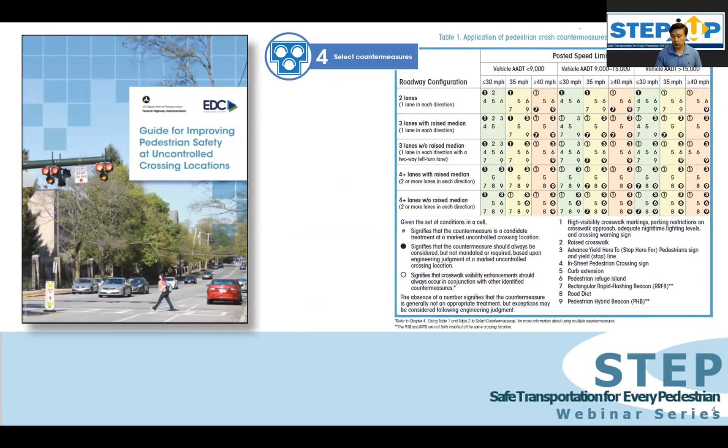So, once again, just a quick reminder with regards to these spectacular 7, and 6 of them are on this table, table 1, which you can find in the Guide for Improving Pedestrian Safety at Uncontrolled Crossing Locations. We really encourage everyone to download that and take a look at this.

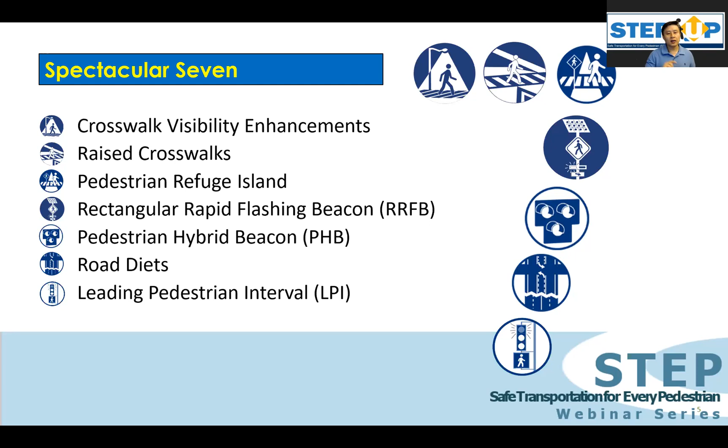And then the spectacular 7, just a quick reminder with regards to what these are: the crosswalk visibility enhancements, which actually has several subcategories with marking, signs, lighting, intersection geometry, such as curb radii and curb extensions. And then you have raised crosswalks, pedestrian refuge islands, the RRFB, the PHB, road diets, and leading pedestrian interval. Remember, the leading pedestrian interval is the only spectacular treatment that is not in that guide. It's specifically for signals.

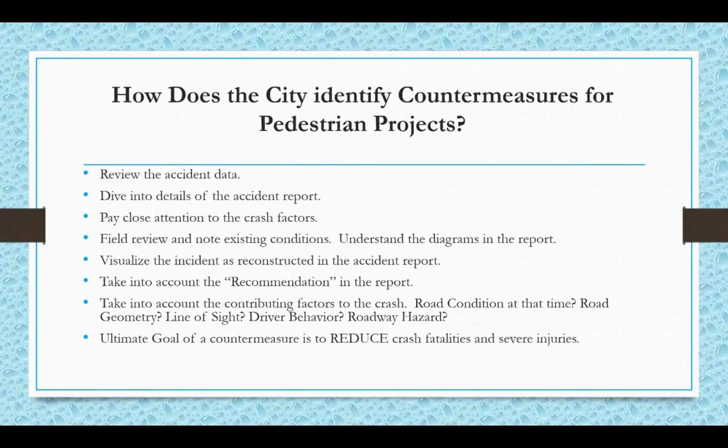So for the next few cycles here, from Cycle 5 to Cycle 10, I'm going to go over the countermeasures that were identified for each of the projects. So in Cycle 5 here, I have 3 countermeasures, 3 separate projects. The countermeasure here for the first one is rectangular rapid flashing beacon in school zones. So the locations here are identified on roadways that were near a school zone.

There has been communication and actions taken prior to help improve safety in there. However, a rectangular rapid flashing beacon was the best suited treatment for those school zone areas. This was communicated with the schools and the communities, and we got the project going and they were implemented. And we're still checking on the monitoring in there. Indications show that the accident history has gone down as far as reported incidents with pedestrians.

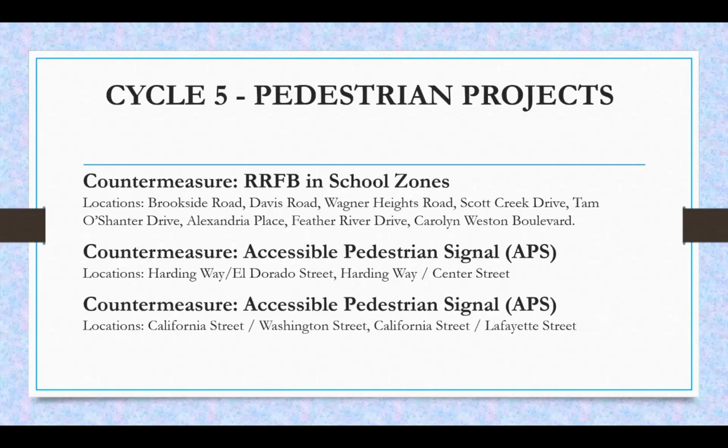So for Cycle 6 pedestrian projects, we received funding to implement rectangular rapid flashing beacon on various roadways such as AG Spanos, Center and other places here in Stockton. The next one here is pedestrian crosswalk safety improvements on West Lane, which included high visibility crosswalk, ADA ramps, and other markings and signing. Another one here is pedestrian crosswalk safety improvement with a signal on B Street and Arch, which included APS, crosswalk across Airport there, which is still a busy roadway.

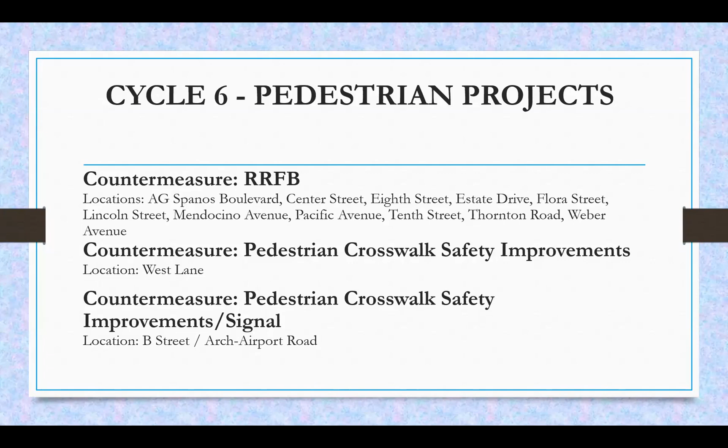So for Cycle 7 pedestrian project, we received funding to install a HAWK on Airport Way and Sonora. This is basically to help facilitate pedestrian crossing from one side of the street to the other. Both sides of Airport have bus stops, and this project is in conjunction with a partnership with RTD.

So for Cycle 8 pedestrian projects, the first countermeasure here is the HAWK. This is at Carolyn Weston Boulevard and Ishi Goto Street. Initially, this was looked at as a possible rectangular rapid flashing beacon, but due to the nature of the incidents that occurred there, and also Carolyn Weston being higher volume and higher speed, a HAWK was more suitable. So that was decided and implemented.

Another one here is the countermeasures in the school districts. So between the schools in the area and the communities, these were discussed as being more effective as rectangular rapid flashing beacon. Another project here is a road diet on El Dorado from Hammer Lane to Morada. This is switching your typical 4-lane into 3-lane.

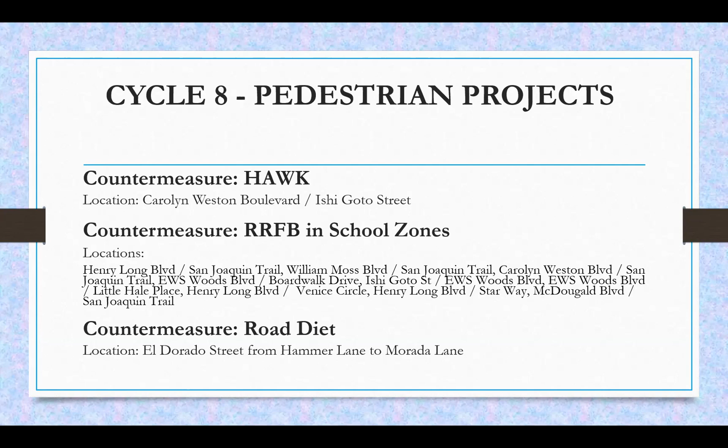So this will have a two-way left turn lane, a single lane on each side. Bike facilities will be installed in there, as well as other treatments to slow traffic down.

So for Cycle 9 pedestrian projects, the first countermeasure here is rectangular rapid flashing beacon. On the location shown here, these roadways are high volume, which require the attention of the driver to the crosswalk. So in instances where pedestrian involved accidents were reported, an RRFB was the best solution to gain that attention from the driver.

The next countermeasure is the pedestrian crosswalk safety improvements, which involve doing high visibility crosswalks, realigning the pedestrian path to be in line with proper location in there. This location is very challenging because of the geometry and the grade separation that's involved in the path of travel.

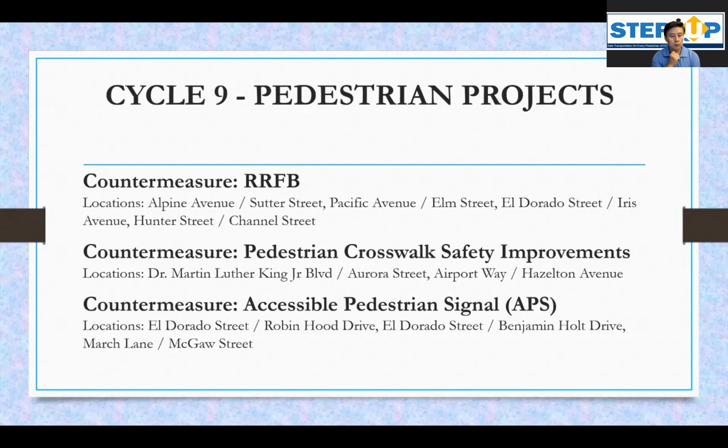The next countermeasure here is accessible pedestrian signal at El Dorado, Robin Hood, El Dorado, Ben Holt, and March Lane and McGaw. These will include APSs as well as the leading pedestrian interval. That'll help improve crossing for pedestrians.

So for Cycle 10, we have a countermeasure of HAWK. This project involves installation of HAWK at 8 locations, generally in the downtown area. That project is awarded about $5.5 million for the installation, including design of the HAWK locations.

Another countermeasure here is pedestrian crosswalk safety improvement at the locations of Madison Street, intersecting with Willow, Vine, Rose, Magnolia, Acacia, Poplar, and Flora. And lastly here is an APS on Pacific and Harding and Lincoln as part of a signal upgrade, including APS to help pedestrians cross.

Now we'll get into the challenges that presented themselves during the design for Dr. Martin Luther King Jr. Boulevard. So the countermeasure here is pedestrian crossing improvements. The challenges are tight or limited existing space for pedestrian paths. Vehicle lanes are also tight on railroad grade separation. Existing conditions are antiquated, limited funds. Although limited, we are able to design and deliver the project. In the application process, there's some strategy in the application to keep a competitive benefit over cost ratio.

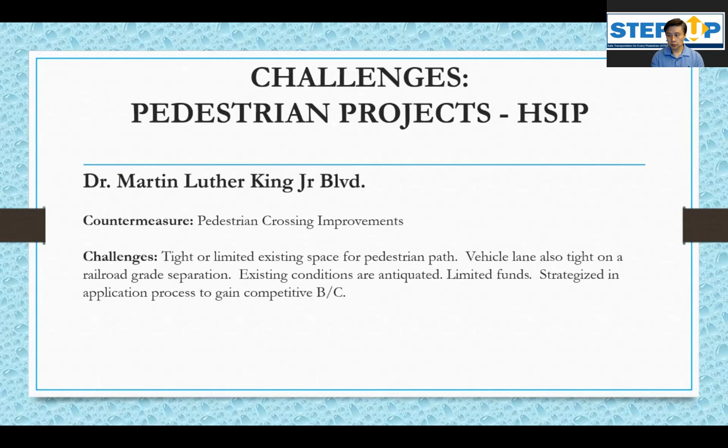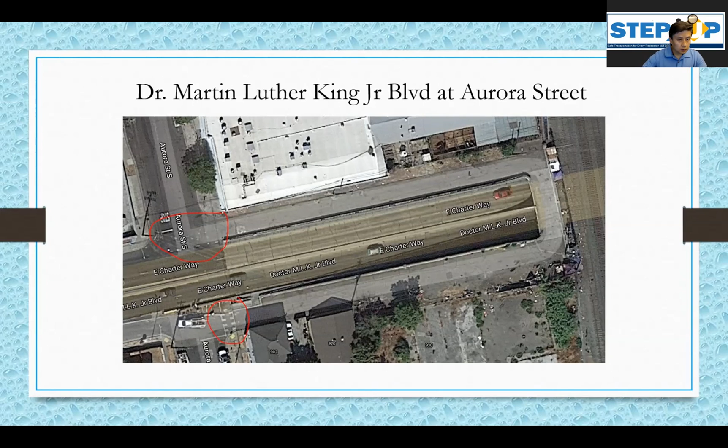This is the aerial view of the location at Dr. MLK at Aurora. And as you can see over there with the highlighted areas of the crosswalks where pedestrians are crossing the street or changing from the roadway to the pedestrian paths. To the right side of the U in there is the grade separation.

The next project that we have challenges on is the Airport Way Sonora HAWK. This one is located south of the Crosstown Freeway with bus stops on both sides of Airport Way with no current marking on the crosswalk. Upgrading of ADA ramps with the underground utilities was a challenge in the design process, trying to locate the best place for the ramp and also trying to stay away from the underground utilities.

Another issue that came up that we are looking into is timing, possibly timing the signal on Hazleton to the south to make sure that progression is at a safe pace when folks are crossing here. We want to make sure that they're timed correctly to make certain that it's safe, not creating additional issues.

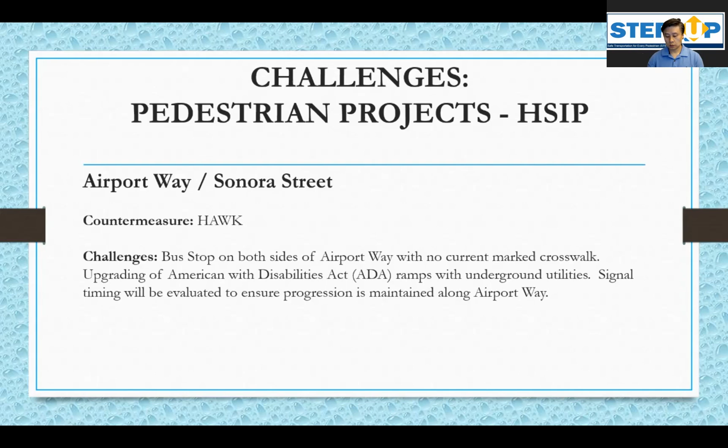Another project that we had challenges on is the rectangular rapid flashing beacon at locations on Alpine Sutter, Pacific Elm, and Hunter Channel. So one of the examples I'll point out here is Hunter Street and Channel. This one, due to the limited funds on it, we decided to keep it in-house so we can design appropriately and also deliver the project within that budget.

The location of pole standards are in conflict with existing utilities and existing street lights or signs. The challenge there is making certain that when we start placing our hardware pole standards, we do not create another project to relocate utilities or be in conflict.

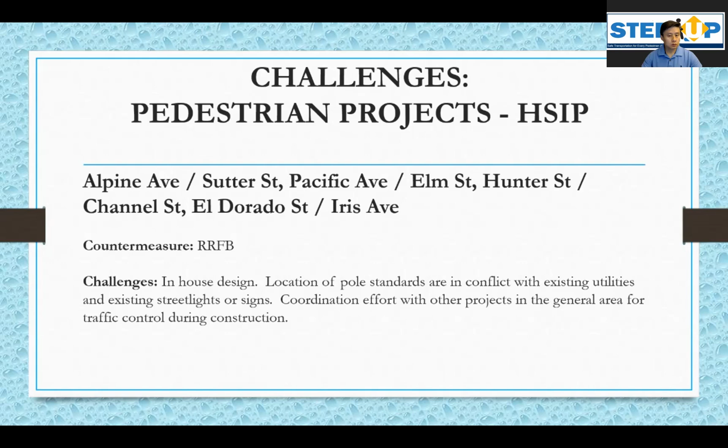Another location that we faced challenges on was the Carolyn Weston Boulevard at Ishigoto when a HAWK was installed. This is a second installation of a HAWK in the city, and drivers are still getting familiar with the HAWK. Speeding is predominant along Carolyn Weston, and so folks are still hesitant crossing in there, even though the lights have a signal to allow pedestrians to cross and to stop drivers. With the early stages of after installation, we noticed those things were happening.

So a City Council member created an educational video to help guide pedestrians and drivers when they're facing the HAWK signal. That helped, and it seems to be helping as we move forward with the installation of additional HAWKs in the city.

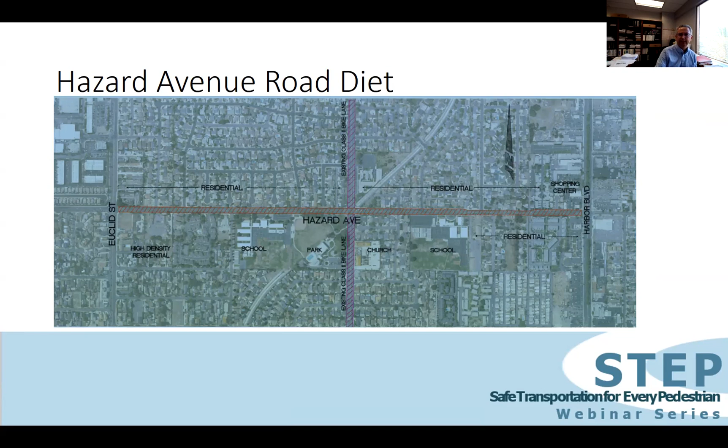One of the things that we ended up doing is we actually applied for grant money separately. One of the concerns that we had early on was what happens if one of the adjacent jurisdictions may have issues, maybe the political will is not there to do a road diet in their jurisdiction. And if we do a joint grant, that's going to hamper our ability to move forward with what we want to do. So that was really insightful for us to do that early on, because eventually as the project progressed, the other jurisdictions who applied for a joint grant for this project actually didn't have the political will. So their project did not proceed. But fortunately, I'm glad to say that our project is actually in the ground.

So the project actually showed the road diet here. We ended up going from the 2 lanes to the 1 lane in each direction. One of the things that we did here is we allowed space for parking. We don't necessarily have the parking out there right now, but we do want to work with the community to make sure that if they want us to add parking, we could do that. So we allowed it so that it's flexible for future consideration if needed. Some areas do have the parking, but not all the corridor.

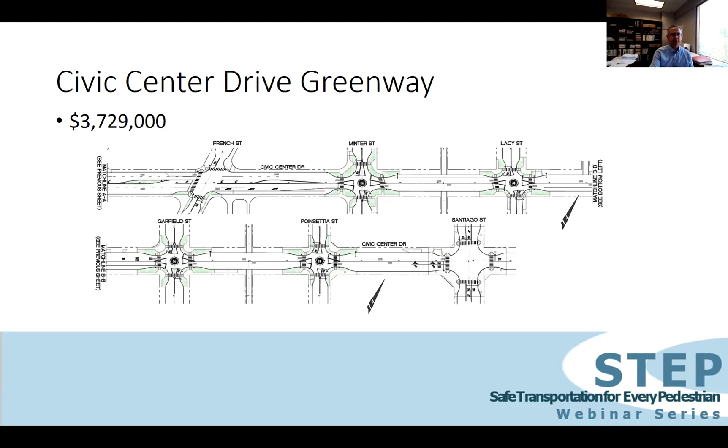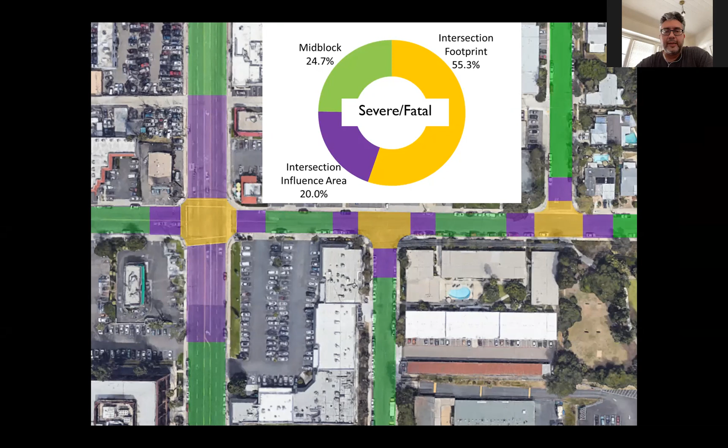And most of these are happening at traffic signals; that really informs the countermeasures that we're looking at. So our top 3 causes are red light running, pedestrians crossing against the light, and pedestrians crossing near the light. And so the countermeasures we'll be talking about today: high visibility crosswalks, countdown timers, LPIs with their blank out signs, and roundabouts with road diets. So let's go to the next slide.

I know this is coming up in some future weeks, so I'll just touch on it real briefly here. We have the FHWA proven countermeasures. That's sort of like a shortcut, so you can have a menu of things to use. So as part of our systemic analysis, which is also thanks to Caltrans grant funding, we came up with a counterpart to that, sort of a complement, which helped us to know where to apply those countermeasures, a shortcut that helps everyone in our city to know. So it's not just us doing it; our development services folks can help, our planning folks can help. So everybody is on the same page.

And we also believe this is applicable to other cities. So you don't have to redo all the analysis that we did. It should be fairly helpful for folks. So I just want to let you know that's there, but you'll probably hear more about systemic analysis later on. And next slide.

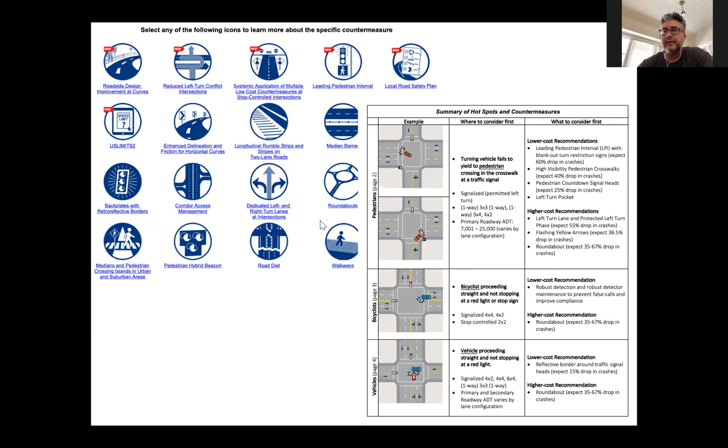So we'll just start off talking about high visibility crosswalks and countdown timers first. These are basically going to be good no matter where you do them. And so we started with developing a city standard policy. At every traffic signal and every mid-block crossing, the standard is high visibility crosswalks. And at every traffic signal, the standard is the countdown type timers.

And so what this allowed is they're not waiting for us to tell them where to put them. Anytime a street is resurfaced, anytime an intersection gets an improvement, these things go in all across the city. And so that's been a tremendous help. In addition, I also want to thank the Caltrans HSIP program again for their recent grant for several hundred intersections worth of these countdown timers that we're installing actually today and ongoing. So next slide.

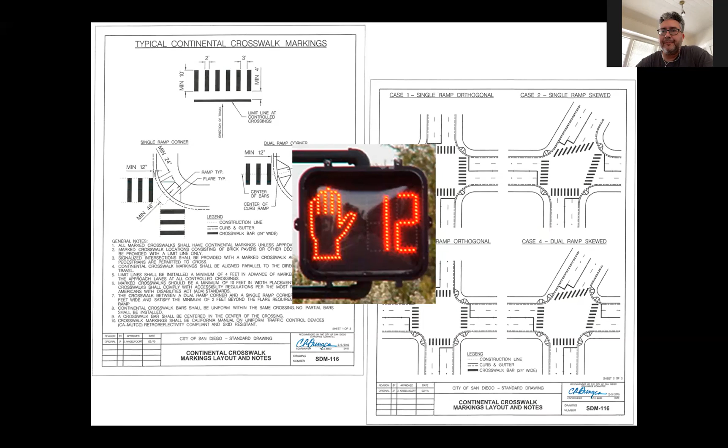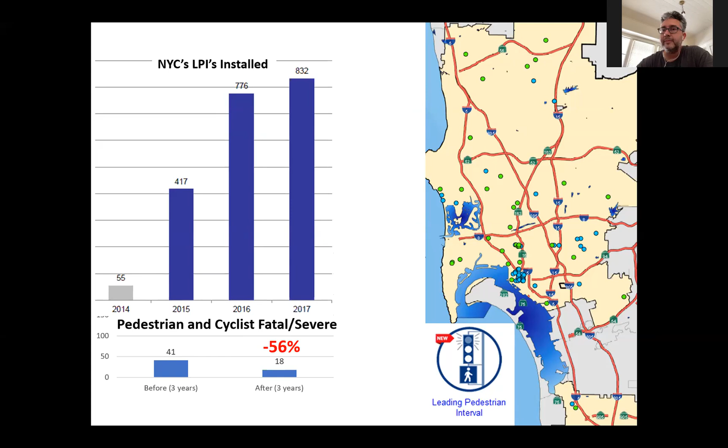So here was sort of a roadblock or a challenge, I guess you could say. When you're going to put in an LPI, it's basically free, unless your controller can't do it and you've got to upgrade the controller. For the most part, it's just an easy programming change. But the thing that came with it is you want to make sure that people are not approaching the intersection, looking left, seeing that oncoming vehicle slowing down because their light is red; the pedestrian gets the walk, and they don't see that because they're looking to the left. So they start to move. There we go.

Before we had this, the policy was if you were going to do an LPI, you had to put up the static no right turn on red sign along with it, which is obviously the cheap way to go, but very costly in terms of driver delay, and provided a lot of resistance to LPIs initially. And so what we did to address that is to use electronic blank out signs. Obviously, they're a little more costly and require some wiring, but they're dark most of the time, so you don't incur all that delay. And they come on right when the light turns yellow for the cross street.

And so it's to keep that driver from trying to look to their left and see if there's a gap. Now they're aware pedestrians are crossing. We're going to put these in with the LPIs. It provides greater awareness to the driver as well as less delay. And so that's basically eliminated the resistance to installing these. So that's been an early success for us. Next slide.

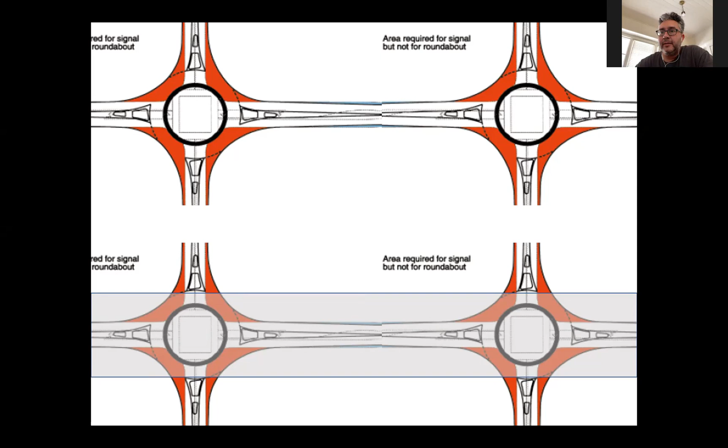And another key feature to kind of help through the challenges is we did a full-size mock-up in a parking lot. We invited the MTS, the bus folks, to come drive through, our fire department to come drive through. They had a great time, and we actually have drone footage of it posted on YouTube, so you should be able to do a quick search and look that up. It's pretty cool. So do the next slide.

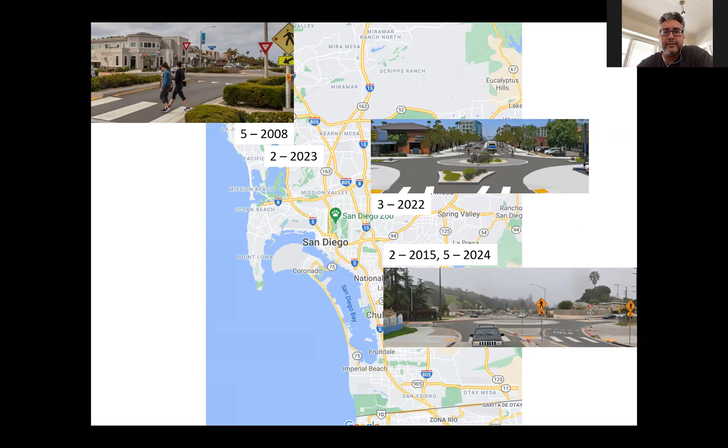So, for the last slide, some of you may have heard this quote, faster alone, further together. So I kind of want to leave you with that idea, although we need to do both to end fatal and severe crashes in our city. So we can go faster with LPIs, improving the signals we have, but we're not going to get to 0 unless we have safe systems. There's kind of 2 criteria. If you forget everything else I said, remember these 2 things.

Humans make mistakes and humans are fragile. So with the roundabout, you have to go slow as you're approaching to make the corners. And as vehicles are merged together, it's a shallow angle. So there's no head-ons, no right angles. It's always just a sideswipe type crash, and it's at low speeds.

It's human tolerable. And then also the vehicles or drivers or pedestrians are all interacting with each other. So if one of them makes a mistake, the other one sees it right away and can compensate. It's fault tolerant. So roundabouts of the future. I just want to leave you with that.

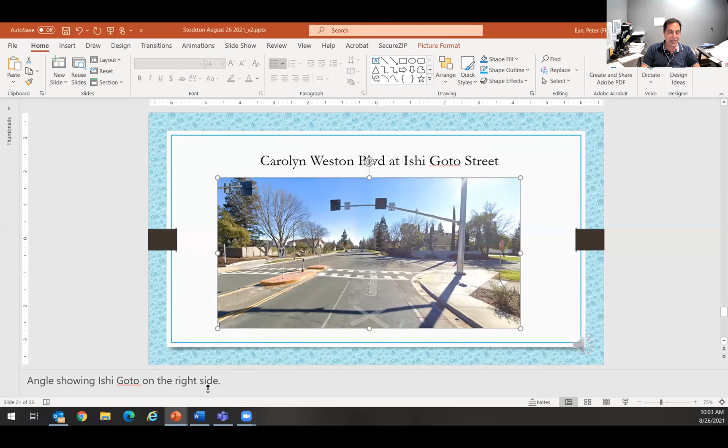Yeah, good question. Thank you for asking that. That's our city standard. We call it a triple four. It's basically a city standard that has like four foot detail on it. That's a standard city detail. I call it piano now, it's just like piano keys. Yeah, that's very interesting. It does the job. It calls the attention of the driver.

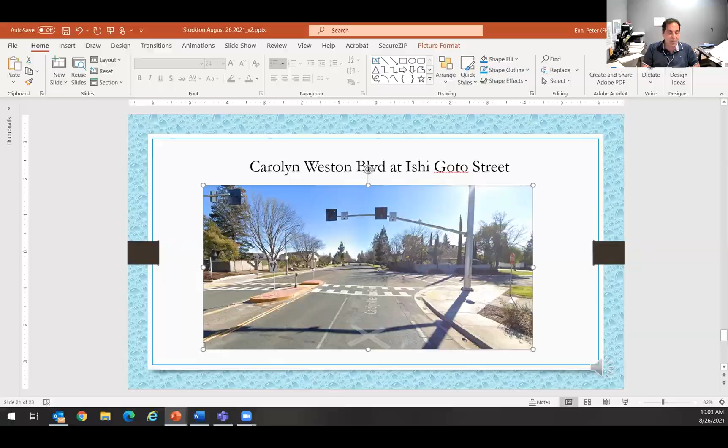My understanding, and I think I've only seen that in California, was that it was designed so that because of the friction or slip when there's moisture, with that cut through down the middle there's less slippage. I think that's California specific; check the MUTCD on that one. Actually, I haven't seen it in other cities of California. That might be my ignorance, but it caught my attention. So I'm going to do more research and go to the City of Stockton Standard Plan to see what the details are. Thank you very much.

Good question. Any other questions? Otherwise, I've got some as well, but want to give you all the opportunity. Great presentations, and I think they covered pretty much all the Safe Transportation for Every Pedestrian countermeasures, in addition to Phil giving us some extra with the countdown and the roundabouts, which really does incorporate well with our road diets.

Okay, Robert Olson asked, have any of the cities that have installed mini roundabouts or similar installed temporary circles to test the paths of travel before installing the permanent structures? So temporary types of installations. Yeah, this is Phil, I can answer that. We did ours in a parking lot, full size to scale, and demonstrated that the software we use, AutoTurn, showed the paths accurately.

Was plenty accurate for our use. And it actually made the bus drivers much more comfortable after seeing that. The fire truck drivers tend to be a little bit skeptical of your software when you talk about that, but when they could drive it, they weren't that close to the cones or the stripes or anything. They were like, yeah, this is totally fine.